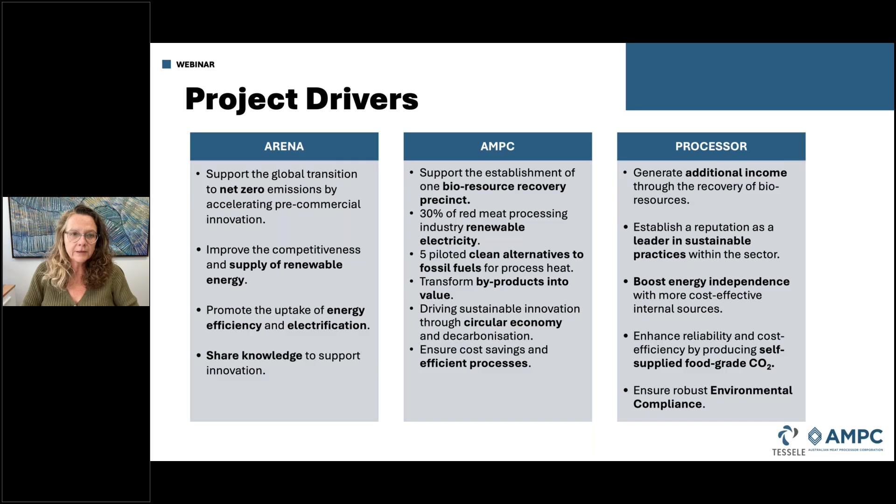So the bioresource recovery concept, we started to develop this together with AMPC probably 5 to 6 years ago. And the idea was really to maximize the use of everything that comes out of a red meat processing plant. In the beginning, we were really looking at the water recycling side of things, on how to produce higher quality water that we could use for non-contact applications in the processing plant.

And from that, we started to evolve into a more sophisticated concept where, yes, you produce very high quality recycled water using an innovative combination of biological nutrient removal, membrane processes, and multi-barrier disinfection. And the focus here is really to maximize the recovery of high quality water. It's not only environmental compliance, just a little bit of nutrient removal, but this is really high quality water.

And by doing that, we concentrate all the streams that are high energy productive, high carbon content, like the sludges, the fats and oils, and the protein, everything that can be used to produce biogas. They are concentrated in the form of a sludge, and then they are processed in a separate reactor type of anaerobic digestion. So just to make very clear from the beginning, this is not a conventional covered anaerobic lagoon process. This is different.

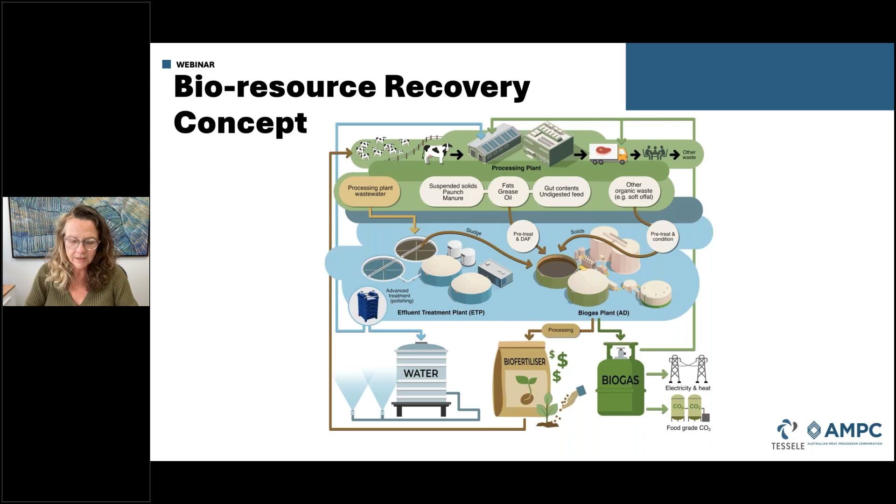So let me talk a little bit more in detail about the methodology. We first started with the wastewater treatment plant design, which is the beginning of everything. This concept is not that you do one thing and not the other, it's everything integrated. That's where you recover the maximum value, right? So in the wastewater treatment we used Excel calculations and BioWin modeling to verify and also to test the robustness of the process.

So we know how we can respond to fluctuations and how we can produce very reliable, high quality treated water for the environment, for irrigation and for process as well. So we have quite good assurance on that. In that stage, we had a two-stage peer review done by external consultants, one consultant in Australia based in Melbourne, and a second one in Austria, where they are very familiar with the red meat industry. So everything we did was checked and tested, and we are very confident that what we put out there is really, really robust.

And then we did the organic byproducts characterization and quantification, meaning we collected samples from the processing plant in Inverell and sent them to a laboratory to test the biomethane potential and also characteristics like volatile solids and total solids. That gives us an idea of how those materials perform in terms of producing methane. We also did a combined sample, not only the individual materials, but simulating the real final co-digestate sample. That was a very extensive process to get those results done, analyzed and converted into how much energy we can really recover.

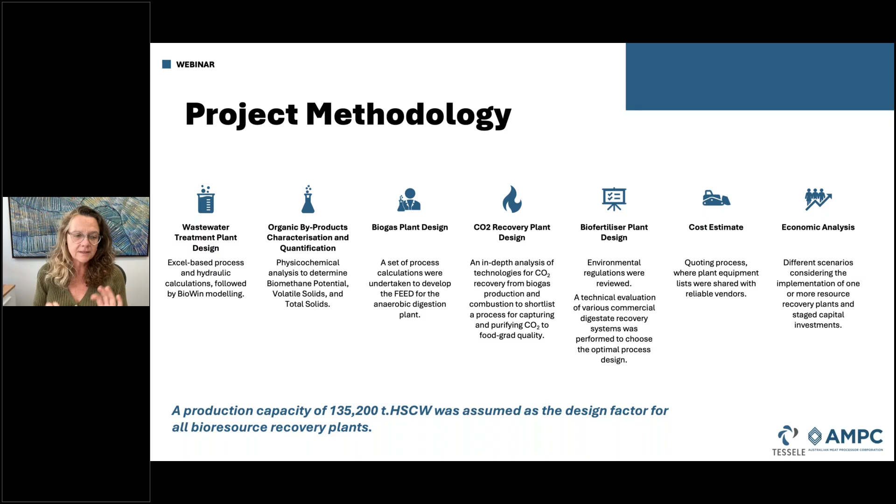And after we had all this, we had an economic analysis done where we consider all the potential revenues that come out from this project compared to costs and operational costs, and we put that on time. So I'm going to present all these results in the upcoming slides here. For the facility that we are using as a case study, we assume the production capacity of just over 135,000 tons of hot standard carcass weight, and that was the starting point, right? I'm going to come into it a little bit in more detail.

So the idea is to implement the project in 2 stages, stage 1 and stage 2. Stage 1 would be around 67,600 tons per year. And I'm not sure if everybody is really aware of what that means, right? It's not only per head of cattle, but it's how much hot standard carcass weight production it is. So we standardize the yield from red meat processors based on that number, right?

So just for you to have a comparison, the Australian processing plants are divided between micro, small, medium, and large. For a processing plant to be considered large, it has to process above 40,000 tons of hot standard carcass weight of beef. This is for beef numbers, right? So this is already considered a large facility in the Australian context. And once it achieves the ultimate capacity, it's going to be in, I would say, the top 10 facilities. So it's not a small, tiny processing plant.

The other thing I want to show is that what we are proposing here requires a large footprint because we have very high retention times on the digesters. It can be up to 60 days. So once you put the material there to recover biogas, average would be 35 to 40 days, but depending on how much biogas you want to recover, this can be even more, can be 60 days. And in some places in Europe, they are operating with 60 days.

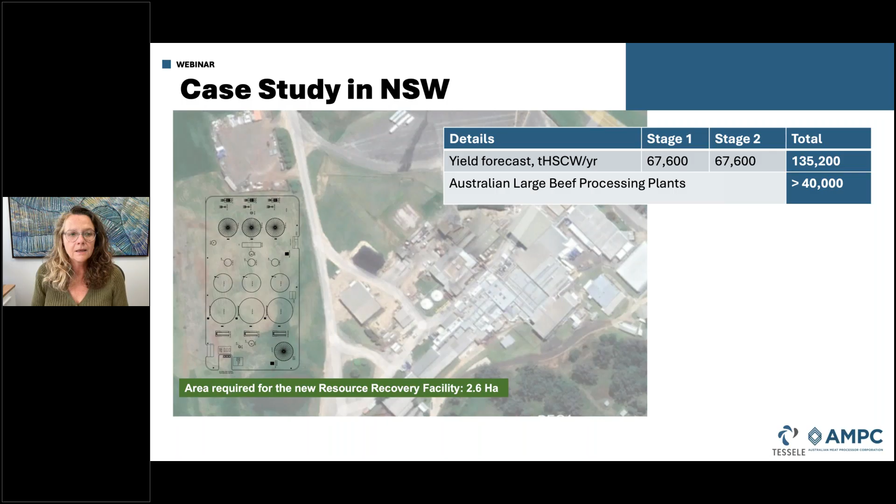Just a little bit more in terms of the red meat industry distribution, just for you guys to understand where we are situated here. And I'm already giving the heads up that I'll present all the results for the large capacity, but in the end, I'm doing an assessment on how these things stack up for smaller producers and what's the kind of sweet spot where you should start thinking of doing something like this. So around 912 head of beef per day is equivalent of around 40,000 tons of hot standard carcass weight. So you can have an idea of sizes, right?

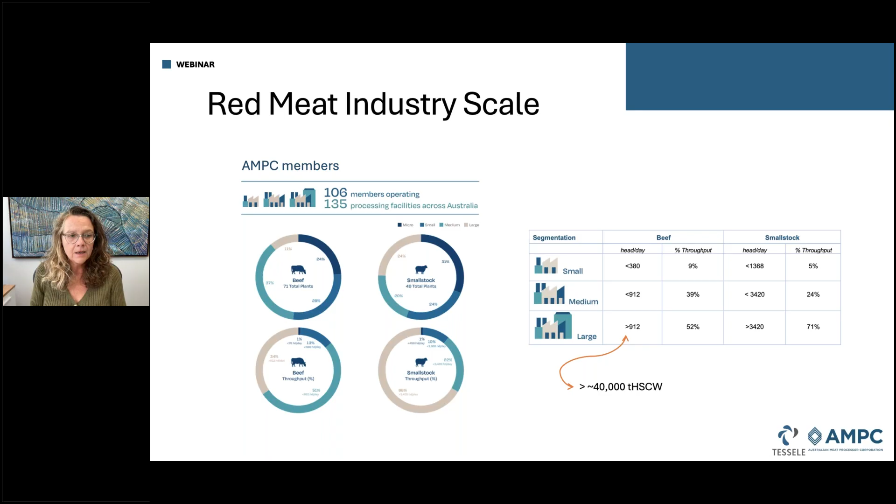Okay, so I'll start talking a little bit in more detail about each of the steps and how we got there. So the first one is the water recovery plant, that we don't call wastewater treatment, because really the objective here is to recover high quality water that can eventually be used in most of the processing applications, of course, non-contact applications in the process. So we start with a very robust pre-treatment using an organic coagulant. And the reason why we do that is to maximize the recovery of all the contents that are high energy value, like the lipids, proteins, fats, and everything.

So we are really focusing on having a really good pretreatment, and using an organic coagulant is something we are also testing as an AMPC project, but the idea is to eliminate metals from the process from the beginning. So when you get all the way to the end on the biofertilizer application, you don't have any limitations in terms of having heavy metals and contamination with aluminum or other things that can come along with metallic coagulants. So this is one part of the innovation, focusing on that step. And some plants, they say, no, we don't do the pretreatment because we want to create the crust.

So in this case here, we don't talk about crust. We want the crust out of it, and we want that in the digester to produce biogas, okay? And then we follow via 3-stage biological nutrient removal. And that is because we really want to go through maximizing the removal of nitrogen as the main culprit here, but also phosphorus. So we design the system not relying fully on chemical removal of phosphorus.

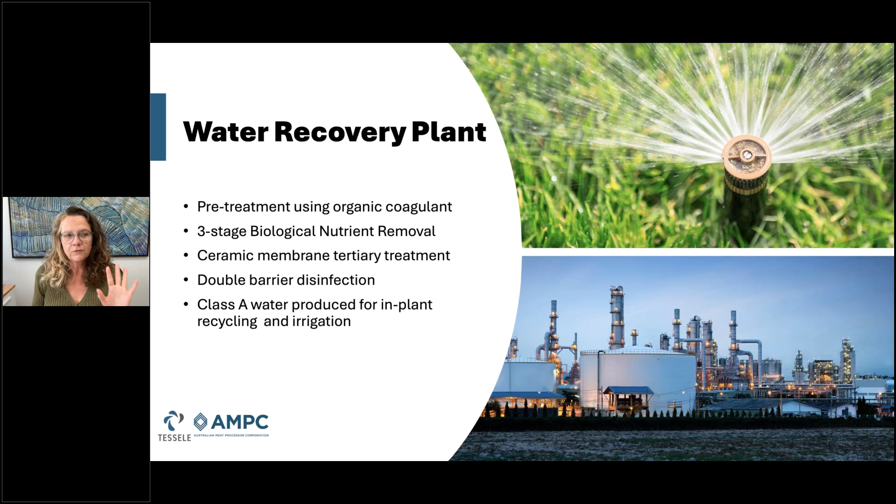So the biogas in this case can be used as a battery for the solar. So when you don't have solar energy produced, you can burn biogas and produce energy from there and balance the peaks using that combination, which I think is really ideal, especially if you have land available, if you are not in an urban area, right? So what we designed here for the biogas and bio-CO2 is a pre-treatment where you have liquids and solids mixed and conditioned.

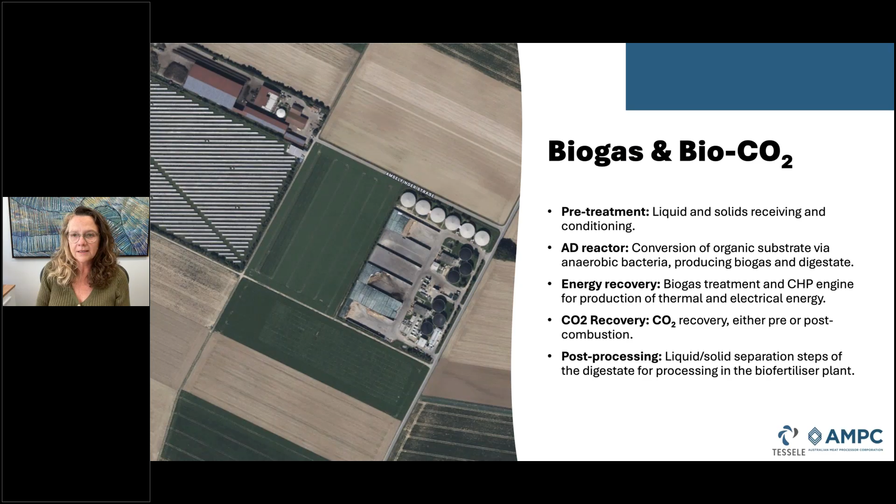So it's post-combustion. And then it goes to post-processing of the digestate, where we have solid-liquid separation steps for the digestate that go into the biofertilizer plant. So there is an entire world here in all these steps, including what you do with the liquid from the digestate, and if you can further recover nutrients from that, or you can incorporate that into your wastewater treatment plant. And there are many avenues you can explore there. Always very complex.

So for the case of Pindari, we had a variety of substrates that were available, and that will be available also in the future with the new wastewater treatment plant. So a big part of it is the secondary DAF sludge from the upcoming wastewater treatment plant. Because we have the biological nutrient removal plant that's going to be installed and operated, we are going to produce nutrient-rich sludge from there.

And then we have a combination of different types of byproducts from the plant, manure, a few other solid byproducts from the processing plant, and also crop stubble from the farms that Pindari has surrounding the processing plant. So it's not that we are using bioenergy crops themselves, we are just using whatever is left on the fields after they harvest the corn as a substrate as well.

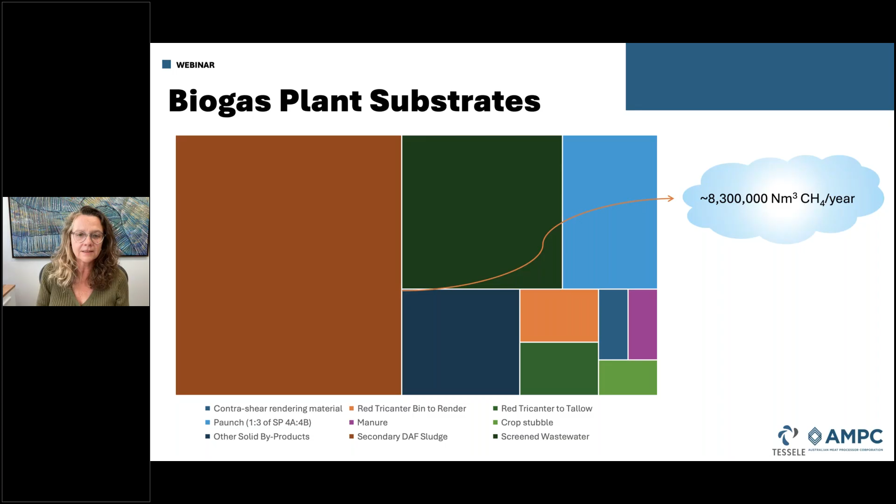So there is a good matrix there of combination of substrates. It's good also because you don't rely only on one, if suddenly something has a bigger value on the market or something. So it's a mix. We did the individual biomethane potential analysis, but also a co-digestion analysis. And what we got as an outcome is that we can produce around 8 million normal cubic meters of methane per year. It's a lot of gas there, which is awesome.

From that gas, we can recover about 183,000 gigajoules per year of energy, while you have 2.3 megawatts electricity and 2.4 megawatts thermal. So it's quite interesting and attractive from the energy point of view.

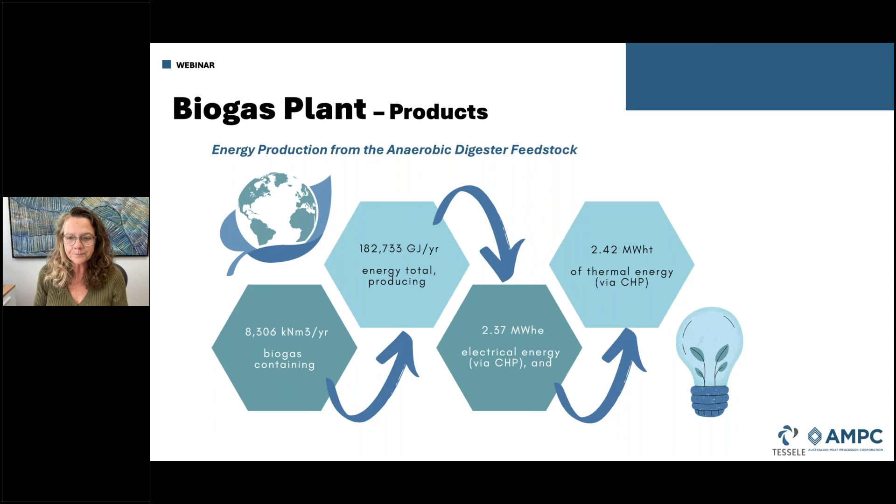And in regards to the CO2, we decided to go by the amine process, which in this case has better economic feasibility for this type of plant. We have several reasons for that, but the cost per metric ton recovered is between around 150 and 220 when we implemented this system. And if you're going to buy food grade CO2 in the market, if you can ever find it, actually, you can pay up to 2,000 or even more.

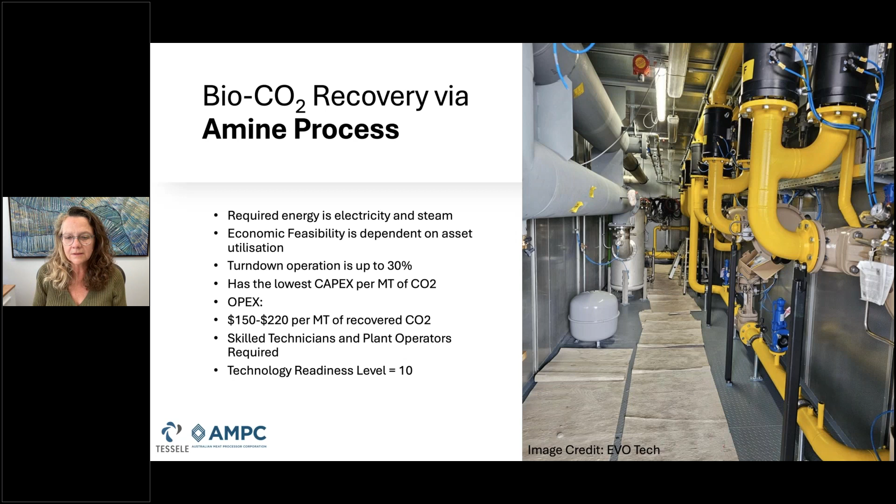I'd be curious to hear later if anybody has had experience with that, how much they're paying for CO2 at the moment, right? At the same time, you also need skilled technicians, the plant operators. It's not a plant that you can just leave there and run, but it gives you a really good return on investment, as we're going to see later. This image here was sent by EVO after our trip to Europe, so thanks Trevor for that.

Okay, so after we recover energy, heat, and CO2, we move on to the biofertilizer plant. That's where you receive the digestate from the anaerobic digester. We are estimating that we are going to receive around 100,000 tons per year of digestate at 5% total solids. That is based both on the assessment we did with bench scale BMP tests and the experience we had in Europe. We saw similar facilities operating with similar substrates, and how the digestate ended up. We also have the analysis and quality of the digestate in terms of nitrogen, phosphorus, total solids, organic matter. So it's already starting to be seen from a fertilizer point of view, right?

So the first thing we do with the digestate is the dewatering to around 22% solids. That is normally done using a centrifuge, and we need a bit of polymer there to make it thicker and the dewatering a bit easier. Interestingly enough, we have a PhD student working only on that step of the process, optimizing the digestate. The dewatering is a very critical step of the project because you can separate the water from the solids and then handle the solids at a much smaller scale, right? Because if you want to get into thermal drying with a high content of water, then you're going to use all your energy for that.

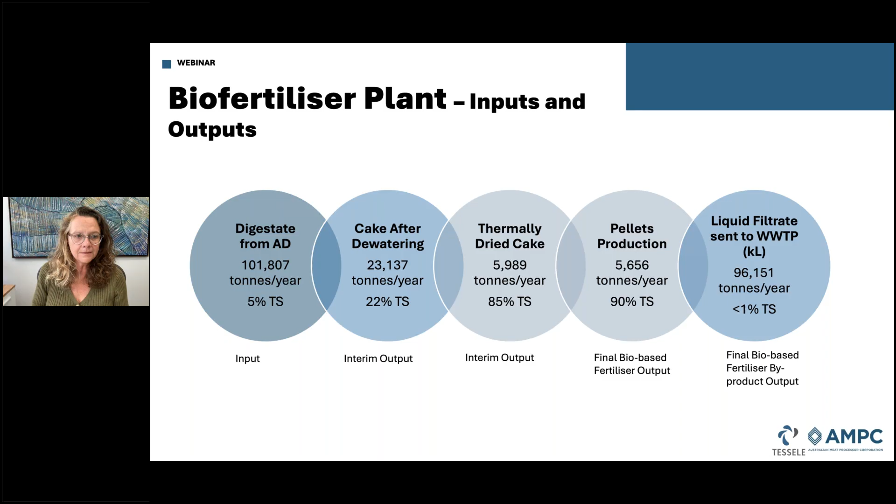And the bio-based fertilizer is a little bit of a gray area in terms of regulation. That's an important thing to touch base on. There is nothing written in New South Wales, or in Australia actually, in terms of regulation for using a biofertilizer based on red meat digestate. We used the biosolids guidelines as a comparison on how we could make this possible. So if there is anybody from the regulator there, I think it's about time we start thinking of putting some regulations around that, and how we can enable this to become a product and not be treated as a waste, right? So New South Wales is one case.

In Queensland, they have the end of waste code, which is also a really lengthy process, but it's possible. In Western Australia, it's seen case by case. So it would be really nice to have a national initiative on valuing bio-based fertilizers from the meat industry, right? And interestingly enough, because this is not coming from domestic waste, not FOGO, it's coming from industry, we have control over contamination issues. For example, nobody's going to throw a battery in this kind of process. It's all controlled. Nobody's going to throw glass in it. So there is a much higher quality in what we aim to produce in a red meat processing plant.

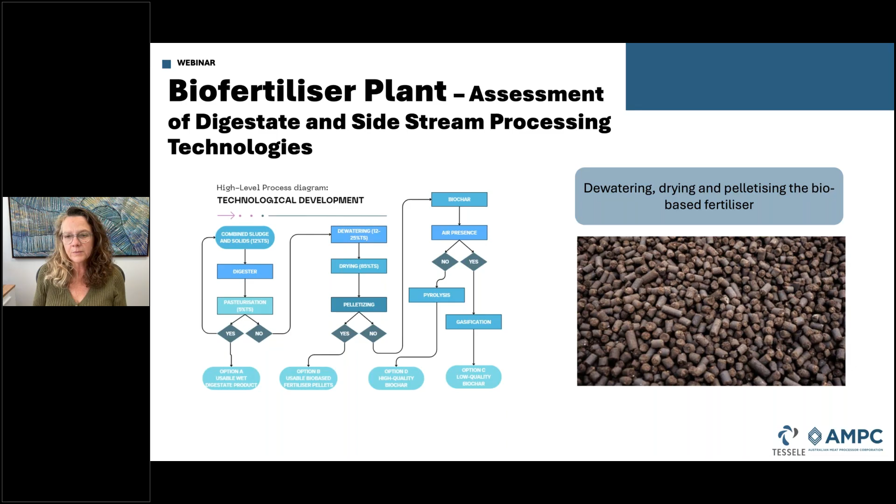So now I think everybody's thinking how much this is going to cost. This woman is talking about all these things, right?

So what we did for Pindari, we assessed many scenarios for the case. We just designed for 2 stages, and then we thought about, okay, what if we do everything at full scale at once, meaning the wastewater treatment plant, the biogas plant, the CO2 recovery plant, and the biofertilizer plant.

Then the second scenario, we didn't do the CO2 plant. The third scenario, we thought, okay, we're just doing the wastewater treatment, forget about everything else. That would be like business as usual, right? Let's just get rid of our wastes and not look at it. And then scenario 4 would be not doing the biofertilizer, do everything else, but in 2 stages.

In scenario 5, no CO2. Scenario 6 is similar to scenario 1, but done in 2 stages. Implement half now, half a bit later. And scenario 7 is the same as 6, but without the CO2 plant. So we compared all this and how the return on investment and CapEx, OpEx would stack up.

It was really brilliant work that Leticia and Lucas did together here, and it was fun. We had promised 3 scenarios only, but we ended up a little bit beyond, but it was interesting.

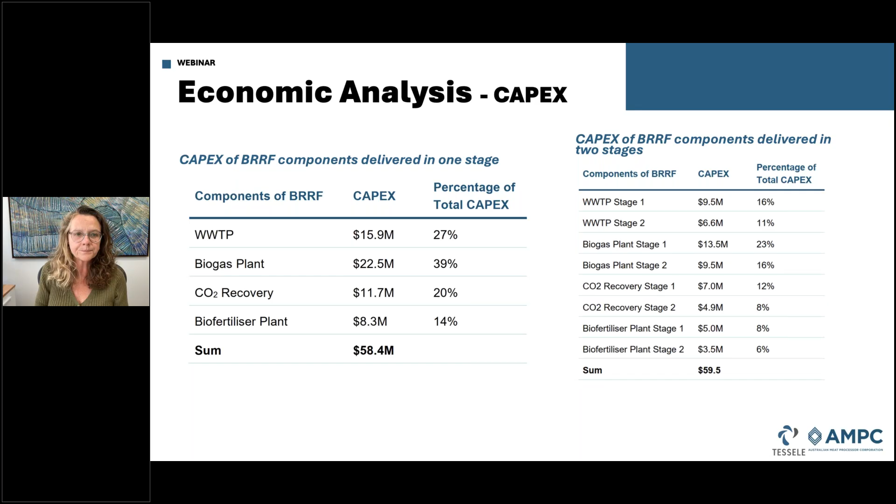So in regards to the economic analysis, the revenue from everything we have, right? So the way we calculated the expected revenue in water for Pindari was replacing the portion of the city water that they're using in their facility with recycled water, which means it's not the full water produced, it's just the amount of water they are able to use as recycling. So it's about, I forgot how much it is now, but around 20%, I think, of the total water.

And then the other part is going to go for irrigation of the crops there. And then we have the electricity and thermal energy in the plant. And so the revenue will be around $1.2 million a year from electricity and 400,000 in thermal. And the liquid CO2, we would be able to recover around 3,000 tons of CO2 a year. And that's important to mention here that this is matching to the demand that Pindari has at the moment.

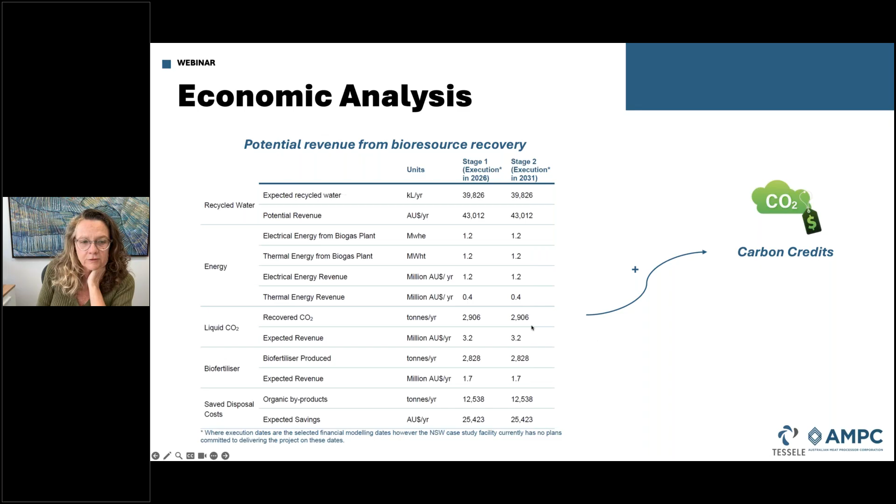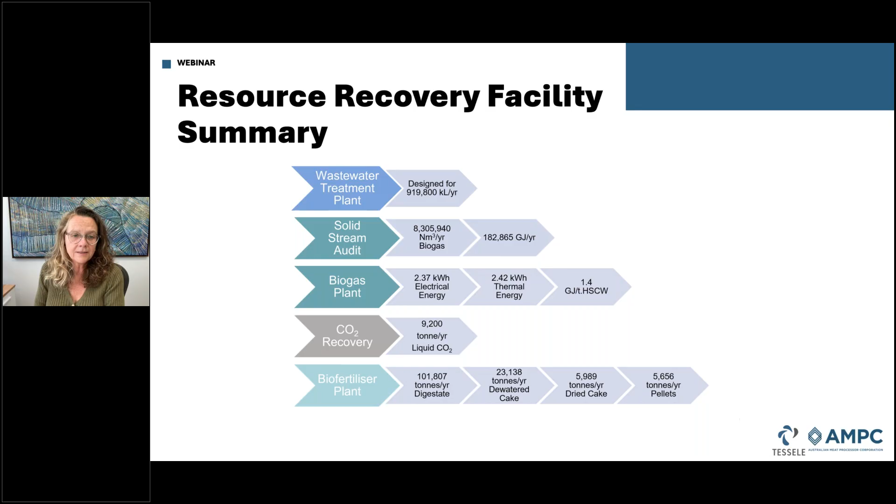So remember before we were talking about 2,900, and combined would be like 5,000, 6,000. So you still have a surplus here of around 3,000 tons of CO2 that could go to the market if you can find a buyer in the area, right? And then plus about 5,000 tons a year of fertilizer pellets. So there are a lot of good outcomes there. Basically here, nothing is going to waste, right? It's really incredible. It's super good.

So as I promised before, I said, okay, this is big. I have a smaller processing plant, how would that look for me? And then with AMPC, we developed another project called the Bioresource Recovery Centers. And for that project, we used the information from Bindaree and also from another processing plant in Western Australia, which is a different capacity and processes lamb and beef together, not only beef. So there are two different capacities.

But if you see here, even smaller facilities, even though it might take almost 20 years to recover the money, they don't go in the red, right? They still can make it feasible, even though there's not a big, incredible return on investment. It's at least break even at the end of, I don't know, 18 years or something. So this is quite interesting, I think.

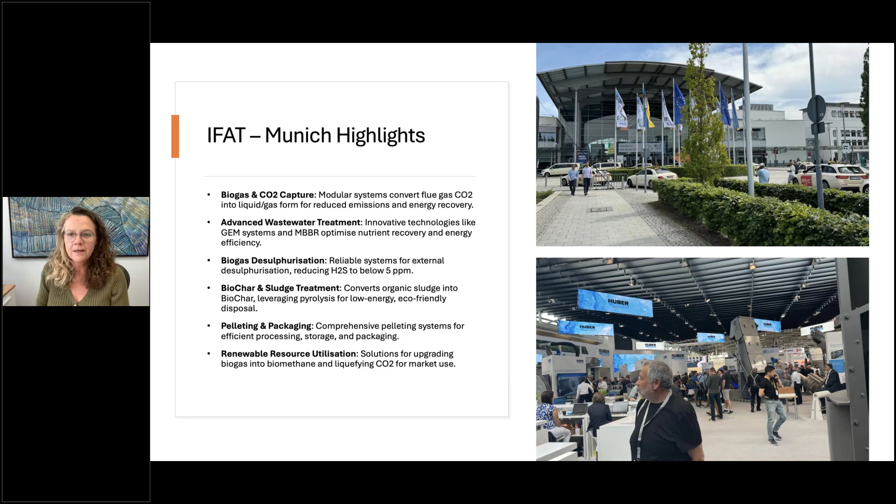Also some interesting pelleting and packaging, because now as we move into producing a biofertilizer, it's not only about that, you have to sell it. So there is a lot of marketing and other things at the end of the chain there, right? And then renewable resource utilization, so how to upgrade biogas into biomethane and liquefy CO2 for market use. Lots of interesting conversations. It was really, really cool to spend time there.

So yeah, I'm just going to wrap up, I'm not going to go too far. So we visited many plants. You can see the combination of older biodigesters in the back, and then the more modern CO2 recovery plants. They are popping up everywhere. So you can see that it is not optional anymore in Europe. Everybody's doing it. It's just normal, right?

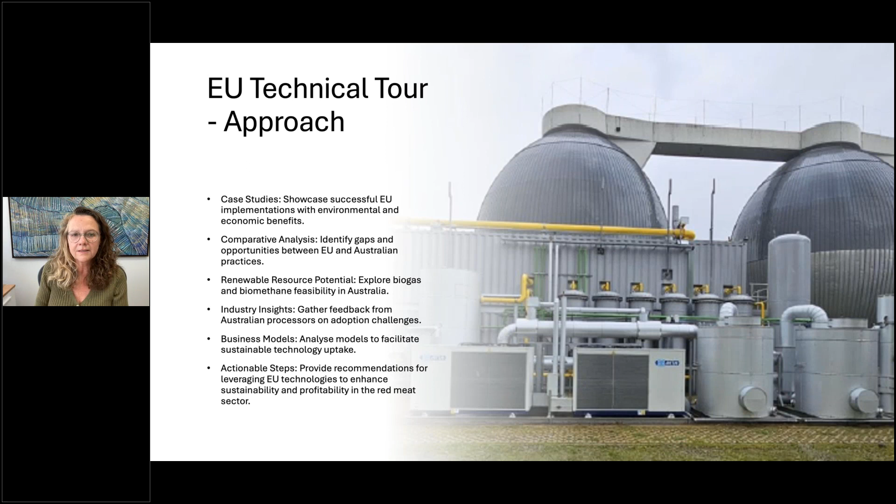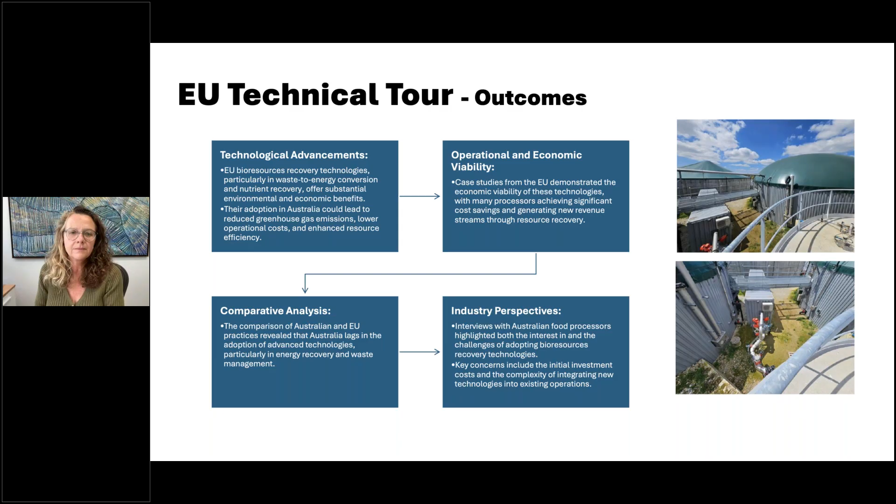And this one I found really interesting because it was a small family farm with a small digester just for the dairy farm, but then they had the CO2 recovery here in the middle, just for a small one. So it doesn't mean that it has to be huge scale. It can be a bit smaller scale as well.

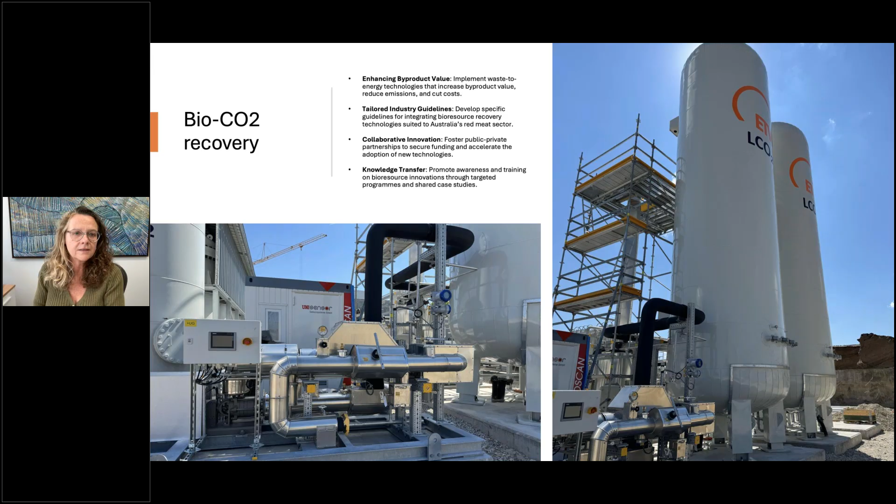And this is a CO2 recovery plant. It's going to be from an abattoir as well, mixed with crops like a co-digestion, similar to what we are looking at implementing at Bindaree. And they were still under construction, so it was quite interesting to walk around while they are still installing things and everything brand new and shiny, really cool. And understanding how the owner was so excited to see this implemented.

And the last thing I want to share is turning risks into opportunities, right? It can be scary to do all these new things and jump, but when you are in capable hands and you know what you're doing, it can be really exciting. And I'll be really looking forward to help and assist moving forward. I think that's what I had to say for this hour, and happy to take any questions now.

Thanks, Fabiana. That was a really good presentation. A lot of detail in there. Thank you. A lot to think about. Chris is joining us for the Q&A now. We've had a couple of questions and just some comments that I have.

You had some great illustrations there around the breakup of substrates and co-substrates in terms of potential bioenergy value, and then the integrated approach and your staged approach, and the time frame and the scale of the investment is significant. But you can see that some of those stages have significant revenue as well, particularly in the bioresource areas. And interesting to note that the wastewater treatment only doesn't have any revenue and is not paying for itself. No. And also it would increase the carbon footprint, right, to achieve the quality of water. Yeah.